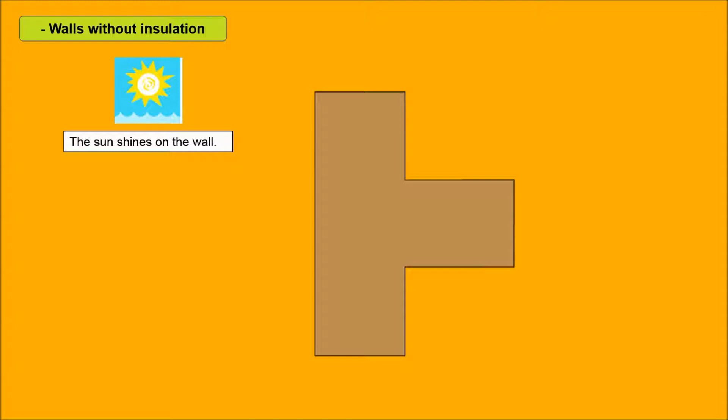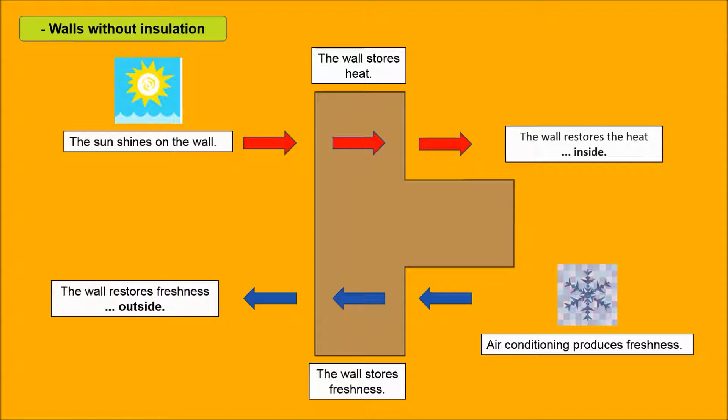Here's what happens with a wall without insulation. The solar radiation hits the wall that stores this heat and restores it into the inside of the building. Conversely, the air conditioning produces cold that will be let into the wall, which in turn will restore it to the outside of the building. That's what we call the thermal bridge phenomenon.

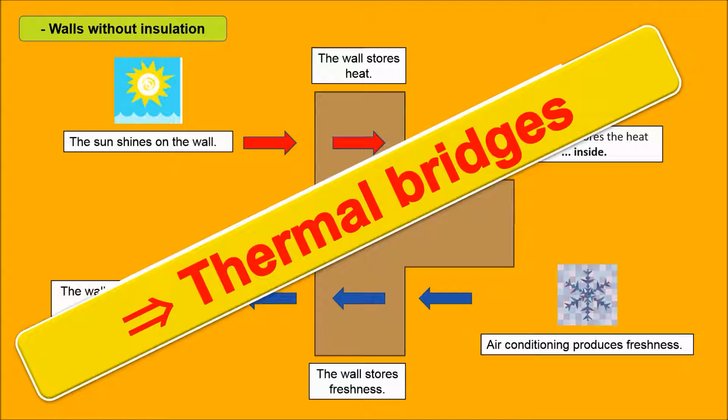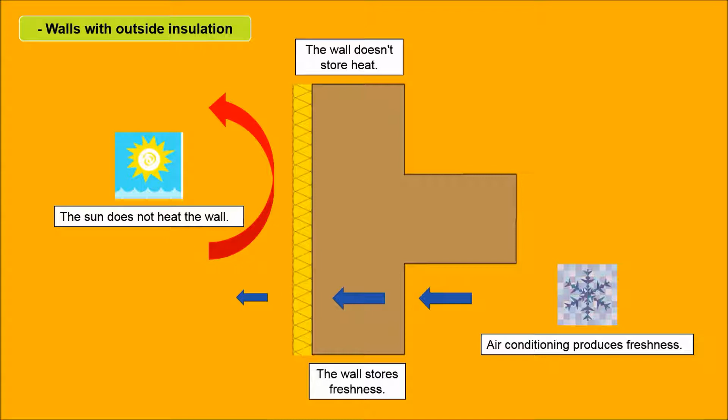So in hot or tropical climate, the building will be warmed by solar radiation and much of the cold produced by the air conditioning escapes to the outside of the building. An absolute nonsense. Outside insulated walls are not hit by solar radiation, but much of the cold from the air conditioning is still wasted and driven out. The phenomenon of thermal bridge is thus attenuated.

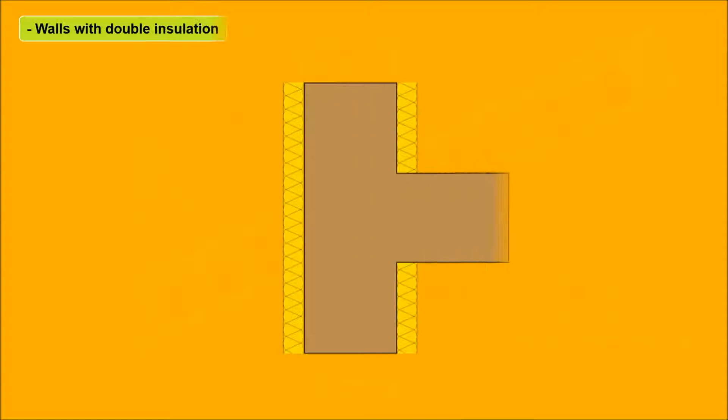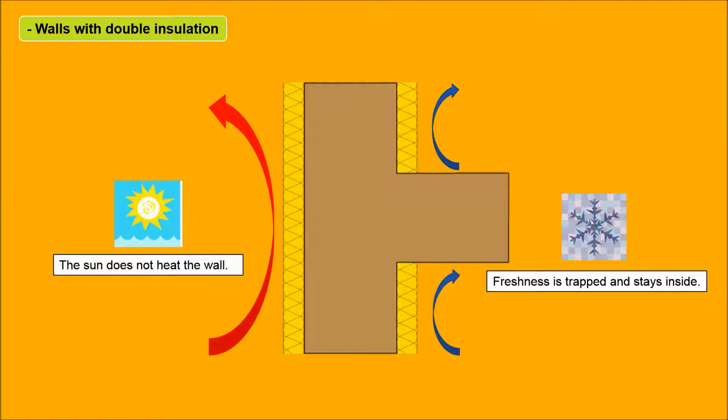With double insulation, outside and inside, the solar radiation does not warm the building and the cold produced by the air conditioning is trapped inside. This ideal building does not know the phenomenon of thermal bridge. The ultimate goal is to move from a passive building, that is to say, with high energy performances and that does not require heating and air conditioning, to buildings that produce more energy than they consume.

In this perspective, three essential rules must be respected. First, removal of thermal bridges. Second, have walls with high thermal inertia. Third, build airtight buildings with controlled ventilation. Thermal inertia and airtightness, two areas in which the concrete walls are most efficient, better than the brick walls and of course the walls made out of wood, materials without any thermal inertia and absolutely not airtight.

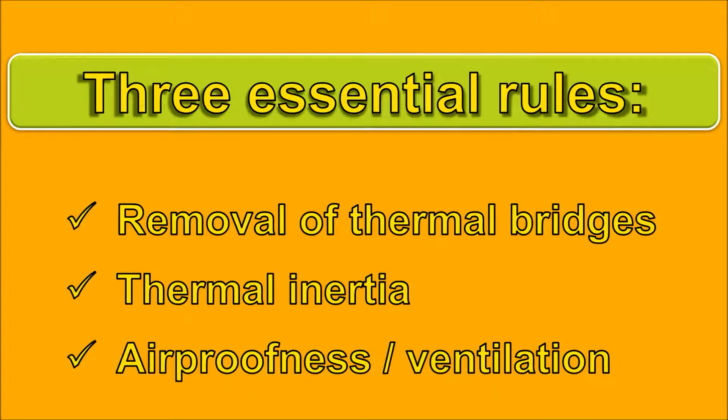Here a dynamic simulation and a study of the potential energy savings in air conditioning carried out on buildings located in tropical climate. The chosen geographical location is the city of Chonburi on the shores of the Gulf of Thailand, quite representative for any tropical climate. Our engineer can of course perform the same study for any geographical situation and specific climate.

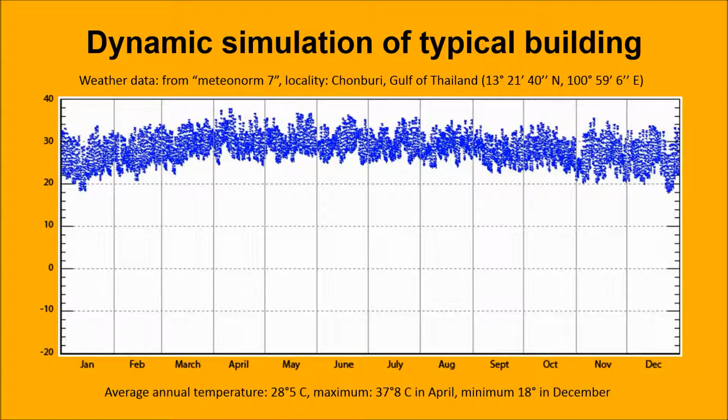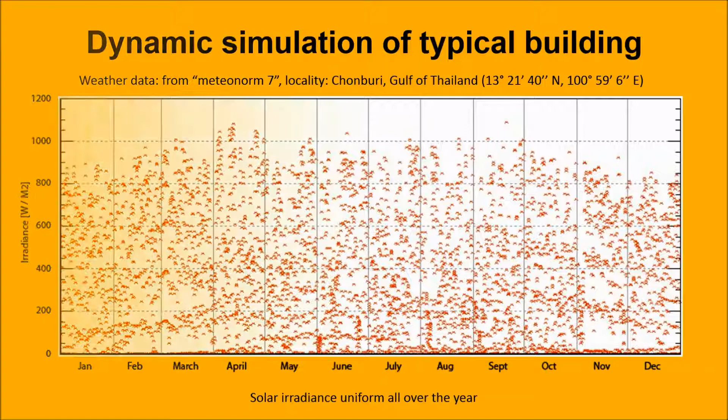We see fairly uniform temperature throughout the year, with a maximum of 37 degrees in April, a minimum of 18 degrees in December, and an average annual temperature of 28.5 centigrade. Vertical solar irradiance is uniform throughout the year. All the data of the buildings were taken into account, namely the insulation coefficients of the opaque elements of the envelope and their contacts with the ground and the air, the insulation coefficients of glazed elements and their percentage in the envelope.

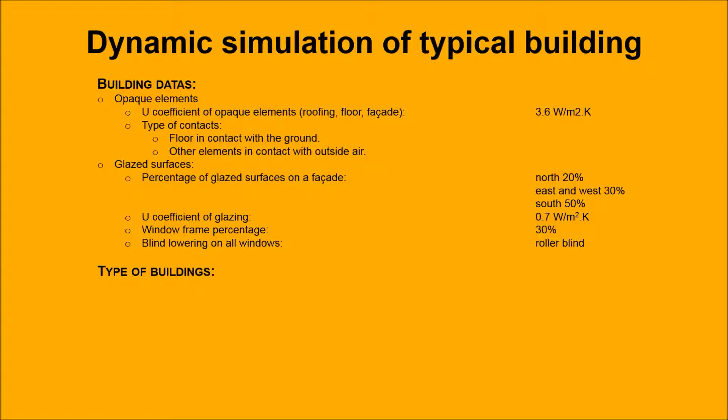Two types of buildings have been studied. The first one, a 10 by 10 meter house with a flat roof, 3 meters high. The second building, a 10 by 7.5 meter house on 2 levels with a flat roof, 6 meters high. And their operating data: the thermal loads of its occupants, appliances, ventilation and so on. All that for a target comfort temperature between 20 and 26 degrees centigrade.

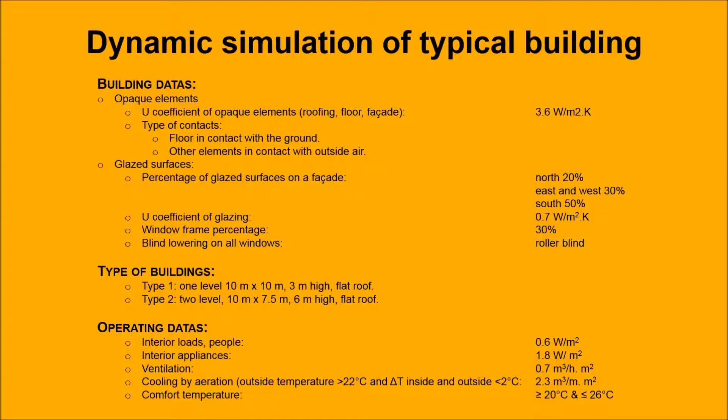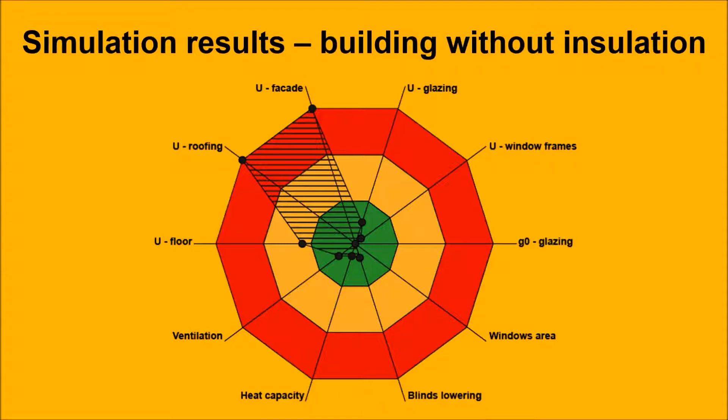Without insulation but with air conditioning, it will consume 100 watts per square meter or 24 liters oil equivalent per square meter. The insulation of the flat roof will lead to a significant improvement and lowers its energy consumption by 32 to 34%, depending on the thickness of the insulation and therefore its insulation coefficient. The insulation of the facades will also contribute to these energy savings by 25 to 26%, again depending on the thickness of the insulation and its insulation coefficient. The insulation of the floor will reduce this consumption by 6%.

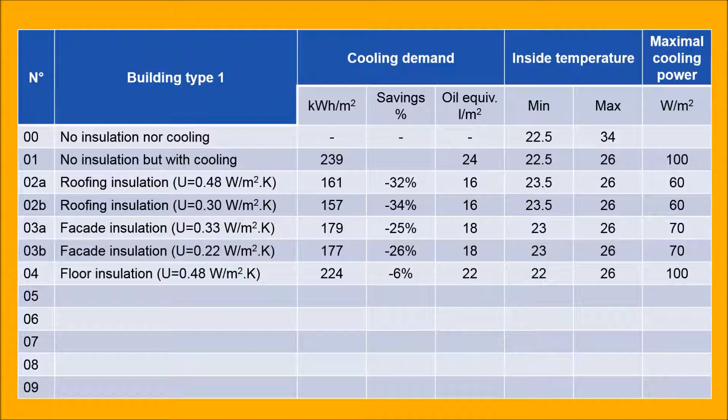The combinations of its insulation elements allow an energy saving between 57 and 65%. Free to the builder or the owner of this building to choose the most relevant combination for its comfort and for its budget, according to the ratio between the investment that the insulation represents and the energy savings on the medium and the long term.

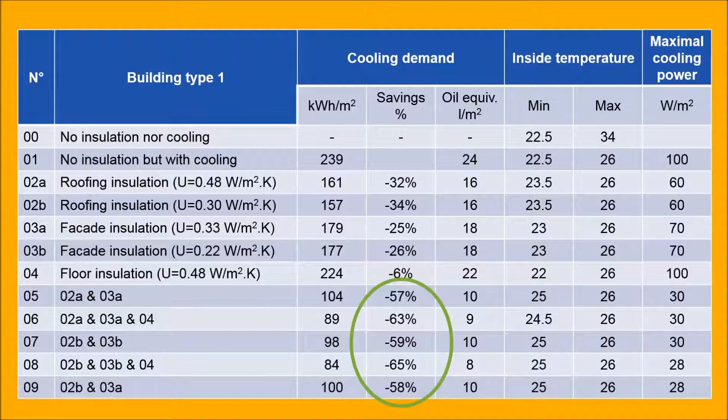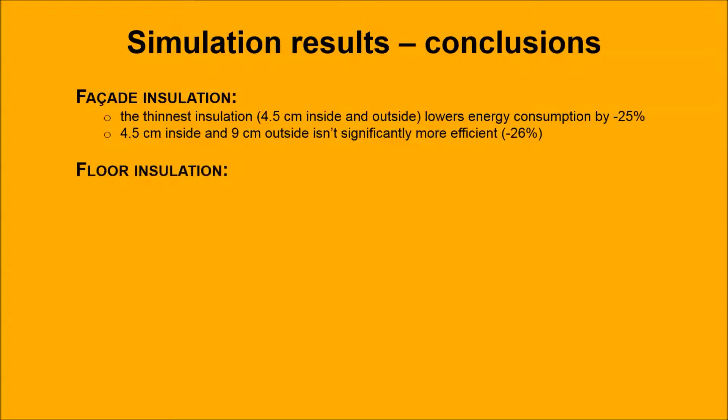In summary, a 4.5 cm outside and inside insulation reduces energy consumption by 25%. A double thickness of outside insulation, that is to say 9 cm, is not significantly more effective. Insulation of the floor contributes only to a small extent because of its contact with the ground. The combination of the insulation of the roof and the facade allows a saving of about 60% for a maximum temperature of indoor comfort between 25 and 26 degrees, and the energy consumption of the air conditioning is divided by 3.

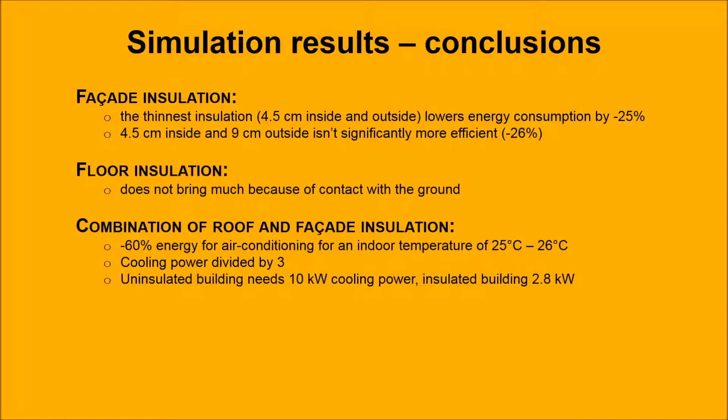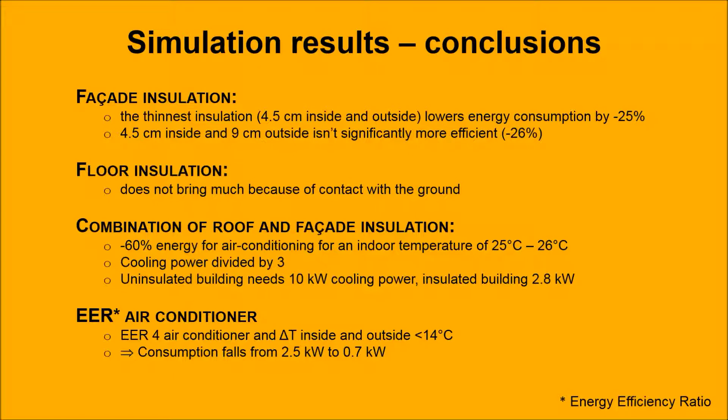An uninsulated building needs 10 kW of air conditioning, a properly insulated house only 2.8 kW. With an energy efficiency index 4 air conditioning system and an indoor and outdoor temperature difference of less than 14 degrees, this consumption drops from 2.5 kW to 0.7 kW. In other words, this building will be able to be air conditioned with the equivalent of the consumption of your hairdryer.

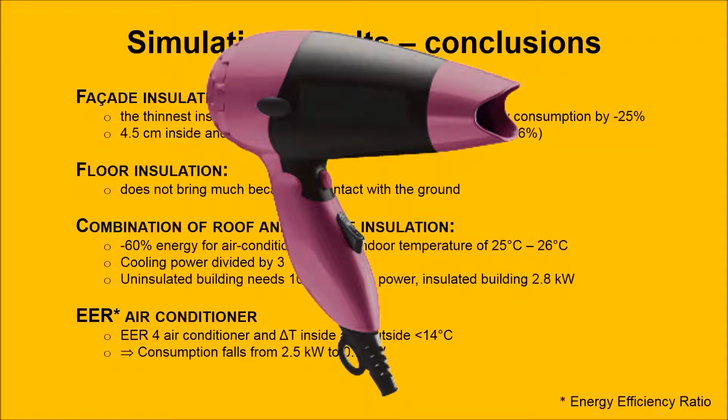For this climate, Euromac 2 offers a 25 cm thick block with 4.5 cm inside and outside insulation and a 16 cm concrete veil. They assemble dry, without glue or mortar, at a rate of 1 square meter per minute, thus significantly reducing labor costs and allowing to pour a floor every 3 days. Dovetail profiles ensure perfect contact and hold between concrete and insulation, between insulation and plaster or coating. The integrated steel structure gives them optimal strength and easy steel reinforcement placement.

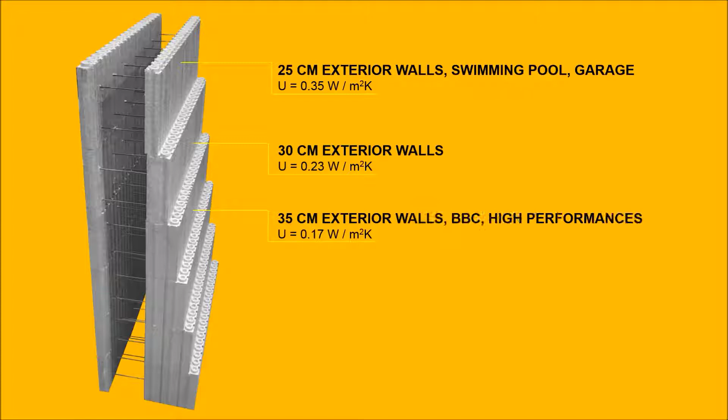Floor-level poured concrete offers excellent thermal inertia, airtightness, and optimum sound insulation. The complete range of Euromac 2 blocks adapts to all climates and uses, depending on the desired thermal coefficient.

Euromac 2 is actively looking for a partnership for the manufacture of its products and offers exclusive distribution in the partner's territory, the complete real-world test of machinery and equipment before delivery, collaboration for the market approach, its parameters and local potential, advice for the sales techniques, a presence on the internet, marketing and communication, the management of sales forces and logistics, technical assistance for customers, assistance for local certification and regulation, long-term commercial and technical support.

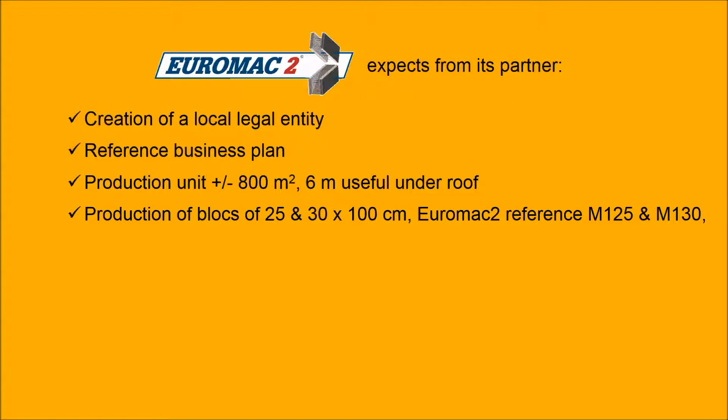Euromac 2 expects from its partner the creation of a local legal entity, a business reference plan, a production unit of more or less 800 square meters on the ground and a useful height of 6 meters. Production of blocks of 25 and 30 centimeters on 1 meter for 50,000 square meters of wall or 300 to 500 houses. An investment for the manufacturing unit of 1.5 million euro or $1.7 million. Management of local elements, terrain, infrastructures, regulation, administrative aspects, etc. Active marketing on his territory, royalties on production.

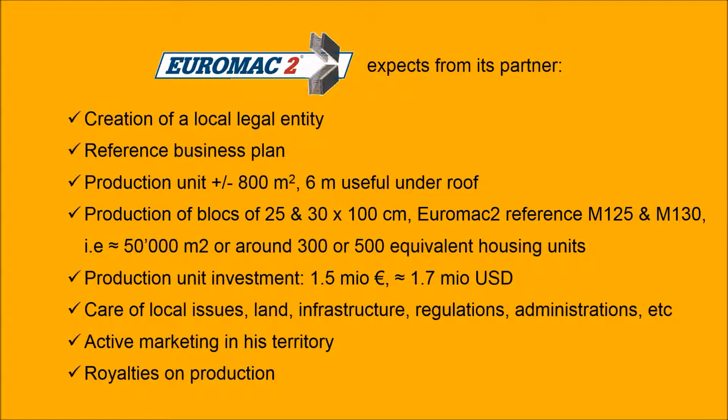Euromac 2 today: a design and customer support team, a registered training center, R&D in partnership with EPFL, Polytechnic University of Lausanne in Switzerland, more than 100 employees, 20 million euros in annual turnover, up 50% every year, one of the 60 best SMEs in France, factory direct sales to professionals and private customers.

Euromac 2 is the leader in passive construction and high energy performance for residential, commercial and industrial buildings. 40 years of innovation and experience, 40,000 constructions completed, more than 1,500 projects a year, the only manufacturer to offer a global wall, roof, slab solution under German Passive House Institute certification.